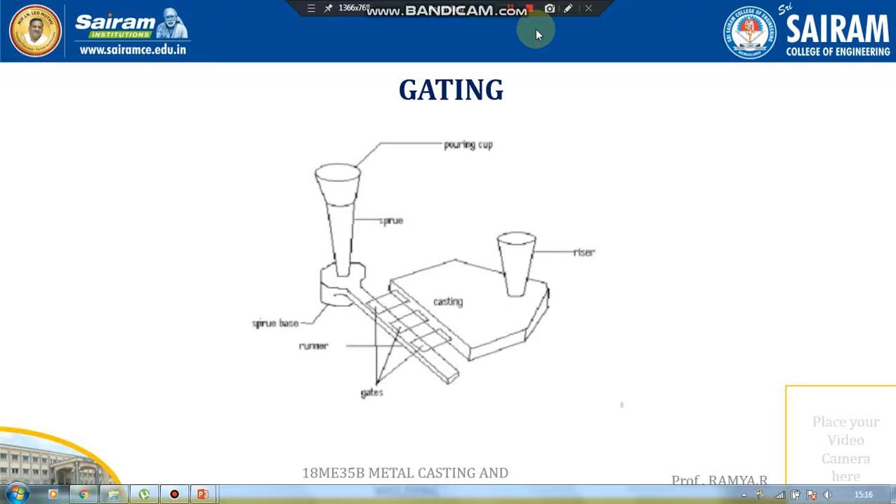Hello everyone. So in this video we'll be seeing about the gating system, that is runner and riser.

So from the initial videos we saw how to do the casting, what are the different types of patterns, the different types of moldings, what are the allowances, the cores, what are the types of cores, all those things we saw. So the next thing is about the runner and riser.

So these are the two essential parts without which we cannot pour the molten metal into the cavity. So for every casting operation the presence of this runner and riser is very much important. So this entire system is called the gating system, where there is a pouring cup, sprue base, runner, gates and a riser along with the cavity. So these things are placed along with the cavity in the mold box.

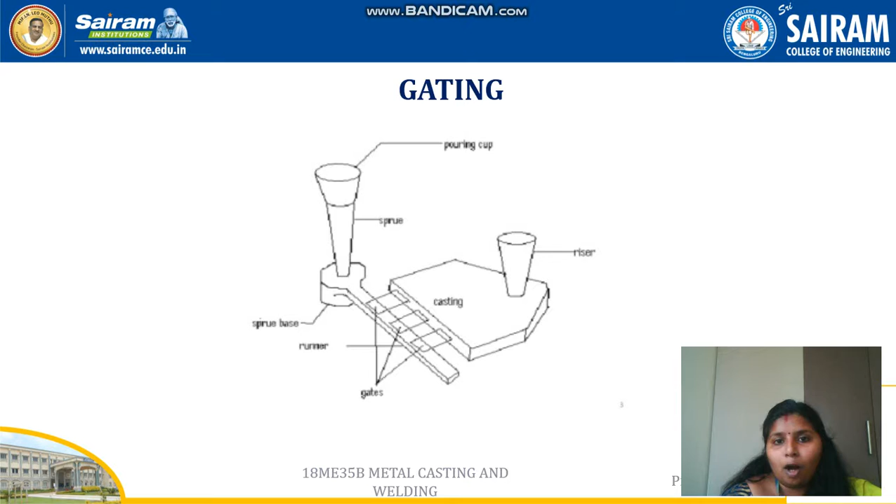So the molten metal, with the help of a ladle, is poured into the pouring cup. It passes through the sprue, reaches the sprue base, and through the runner it enters the cavity with the help of gates. So once the cavity is filled up with the molten metal, the excess metal comes out through the riser. But during the solidification process the metal will be present in the runner and riser also. So during the fettling process, the component along with the runner and riser is taken out and the excess materials are removed.

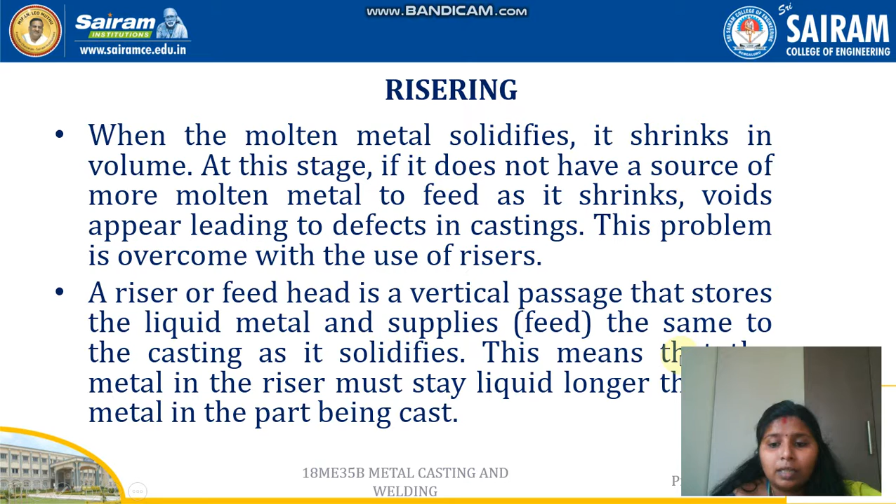Now let us see about what is risering. So when a molten metal solidifies, it shrinks in volume. At this stage, if it does not have a source of more metal to feed it, it shrinks. Voids appear, which leads to defects in casting. This problem is overcome with the use of risers. A riser or a feed head is a vertical passage that stores the liquid metal and supplies it to the casting when it solidifies. This means that the metal in the riser must be liquid longer than the metal being cast.

So, requirements of a riser. Why do we need this riser? A riser must be large enough for the casting detail it is intended to feed. This helps continuous feeding of liquid metal to the solidifying casting so that shrinkage cavities are eliminated. The riser must be kept open to the atmosphere and placed in such a location that it maintains a positive pressure of liquid metal on all the portions of the casting it is intended to feed. A riser should be located in a position that will cause directional solidification from the casting towards it.

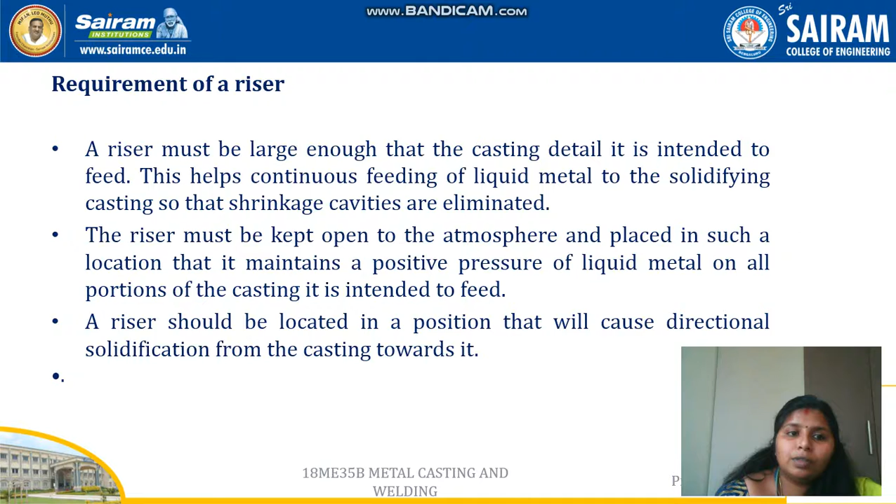So the principles of the gating system. A good gating system should ensure easy and complete filling of the mold cavity. It should fill the mold cavity with molten metal with the least amount of turbulence. It should prevent mold erosion and gas pickup. It should establish a proper temperature gradient in a casting. It should promote directional solidification. Directional solidification is nothing but uniform solidification, like all the parts should be solidified at the same time, and it should regulate the rate of flow of metal into the mold cavity.

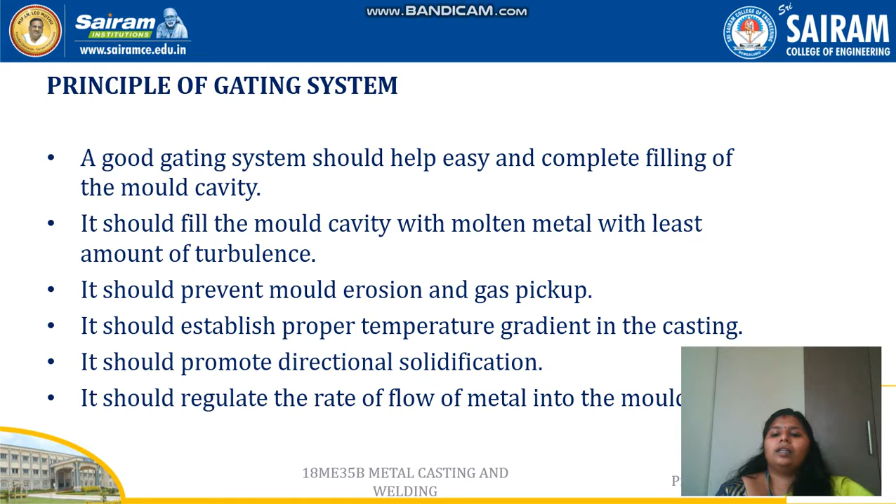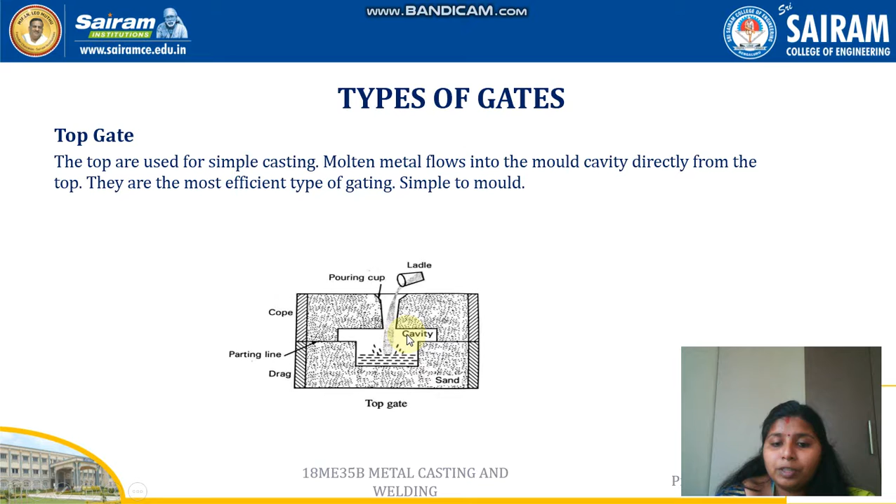So the next one is about types of gates. So what are the types of gates available? The first one is top gate. So this figure shows you the gate that is placed at the top. Top gates are used for simple castings. Molten metal flows into the mold cavity directly from the top. They are the most efficient type of gating and simple to mold. So the molten metal from the ladle is directly poured in the cavity when the gate is placed at the top.

And the next one is bottom gate. Bottom gates are used for denser metals such as steel. Molten metal flows into the mold cavity from the bottom and then slowly rises up. So the molten metal, when it is poured through the ladle, enters the sprue, reaches the sprue base, then it enters the cavity. It avoids erosion of the mold but takes more time in molding.

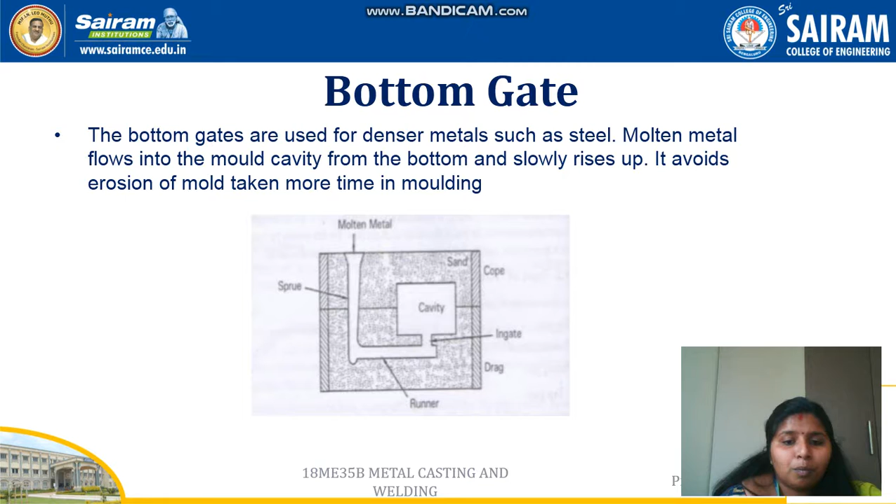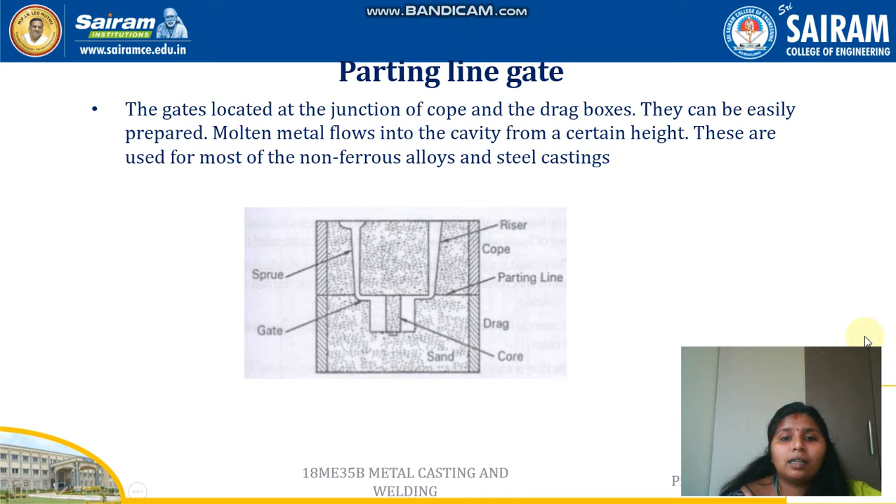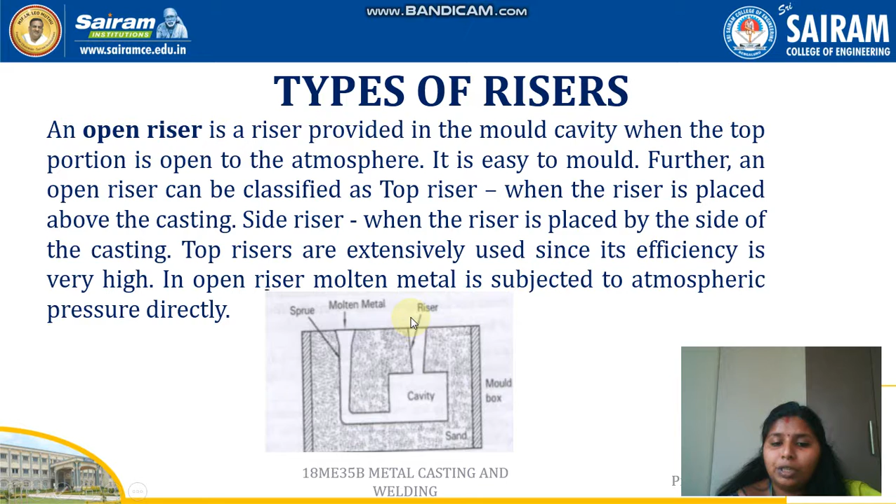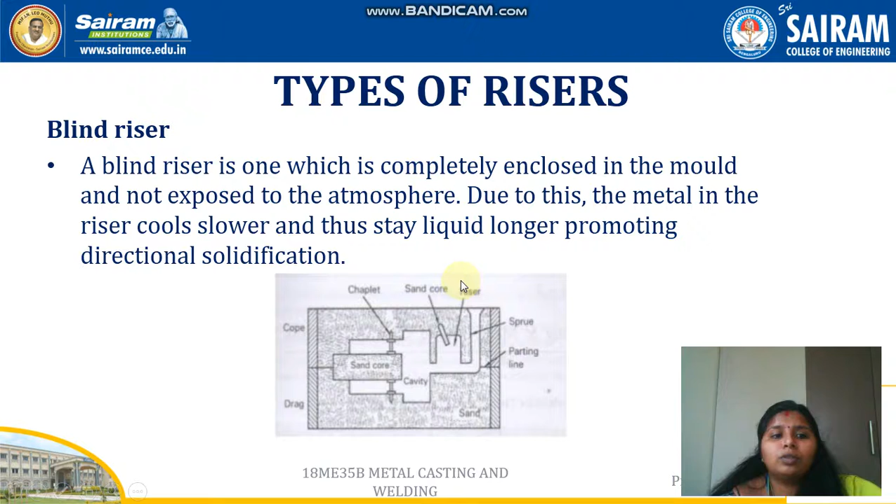And among the types of risers, there is a blind riser, which is completely enclosed in the mold and is not exposed to the atmosphere. Usually a riser will be exposed to the atmosphere, but this type, the blind riser, is not. Due to this, the metal in the riser cools slower and thus stays liquid longer, promoting directional solidification. So in this diagram you can see a blind riser that is not exposed to the atmosphere. So this is about the types of risers and the gating system.